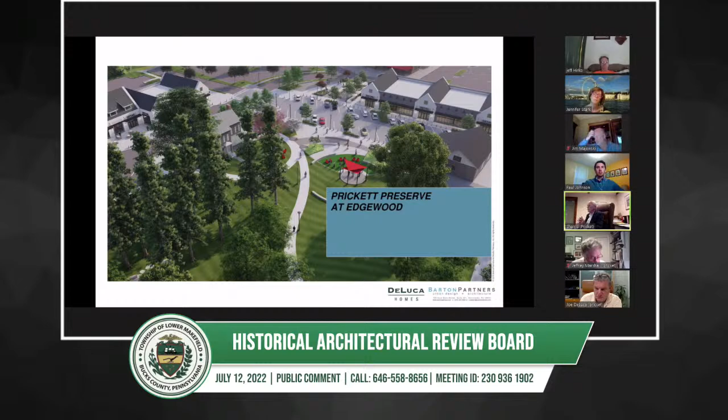I hope all of you got an updated PowerPoint presentation today. We listened, we hope carefully to the issues that were raised at our last meeting, and so we're prepared, we think, to address each one of those. Obviously, we're hopeful that at the end of the presentation and after we've answered any questions that any of the board members have, that you'll be in a position to recommend a certificate of appropriateness to the Board of Supervisors. As just one other issue, we recognize that the presentation tonight and the request to approve the certificate of appropriateness is limited to the barn.

We have not obtained a suitable tenant for the house. We recognize that we have to come back to the HARB for any improvements that will be done to the house to accommodate the adaptive reuse of that structure. So I just want to be clear that we're not looking for any action with regard to the house because, frankly, we don't have a tenant. We don't know what, if any, improvements will be made, and therefore we just recognize that we've got to come back.

So with that, if I may, I'll ask Paul Johnson of Barton Partners, the architect, to run through the PowerPoint presentation. The initial slides you will all recognize for the 800th time, and then we'll get down to the business at hand. Thank you, Paul.

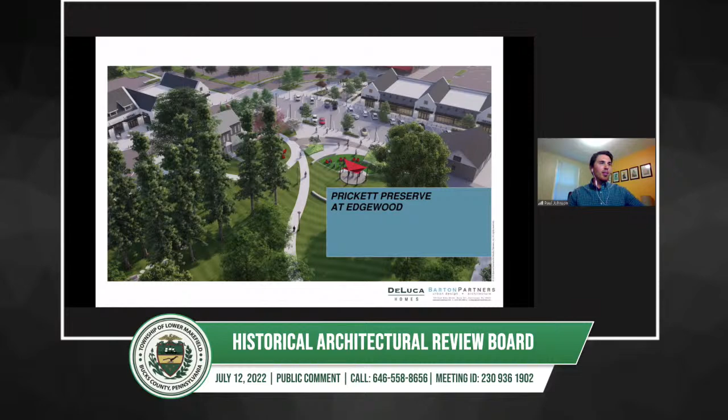Evening, everyone. I'm Paul Johnson from Barton Partners, as Steve said. The project we are presenting is the Prickett Preserve Barn. This is part of the Prickett estate. It is currently being used as an antique store in the existing barn.

The Prickett family has owned the property since the 60s. They have made improvements over time to the barn, and they have also lived in the house on the property. The barn itself is from the 1700s, 1800s. It's a standard stone structure with a minor addition on the front of the building. So the original barn would be the stone area shown here, and the later additions by the Prickett family would be the wood-clad and stone foundation areas of the front of the building.

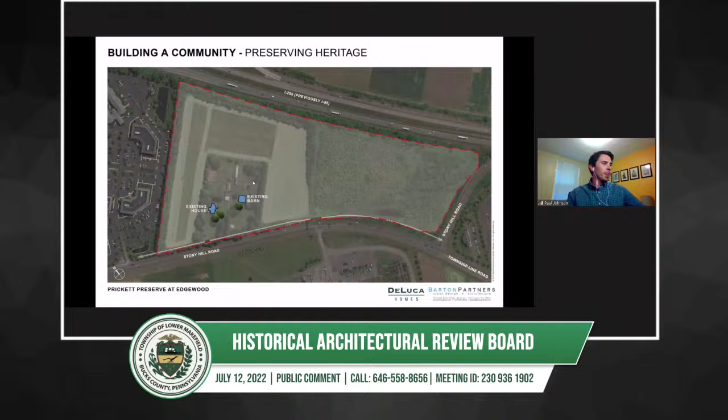This is an overview of the overall site with the Prickett's home and the existing barn, which will be remaining. The remaining buildings on the site will be removed as part of the redevelopment. With the redevelopment, there is a mixed use occurring on the site. Surrounding the barn and the house will be new retail buildings, a grocer to the far end, and an apartment complex with about 200 units and a clubhouse for residents.

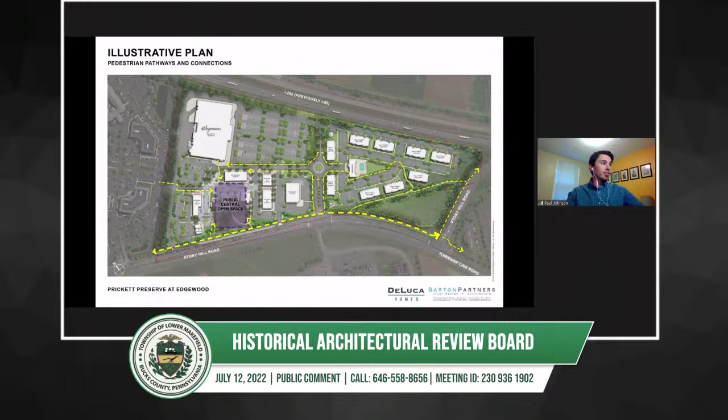This is just a further developed landscape plan of that site, just to show the park setting that we're creating with the new land development. And the goal of the area between the barn and the house is to maintain an open central public space that can be used for events, park space for the residents or anyone that's shopping at the retail buildings.

This is just a close-up view of that area. So there's walkways, there's a stage for possible performances, all situated between the existing house and the existing barn. This is a view with the barn on the left and the house to the right, showing that stage and that open park area relative to the retail at the bottom left corner of the image.

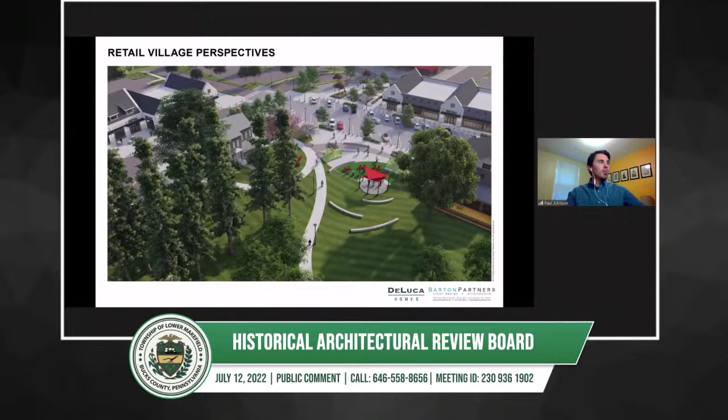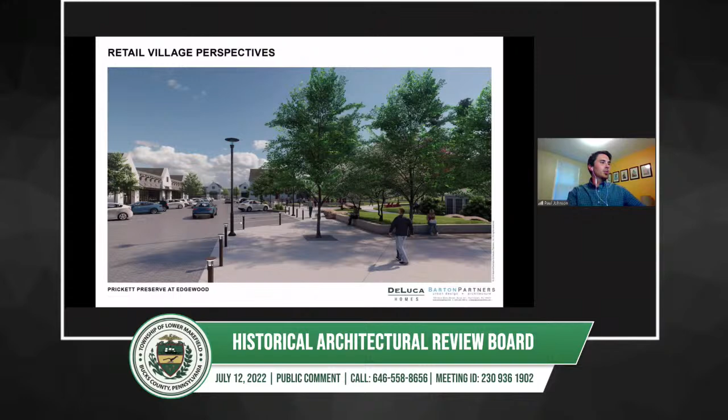The intended use of the barn is to use the existing barn as it stands, using the layout that's already there for the Prickett's antique shop, but adding an addition around the barn to be used as a restaurant space. The restaurant would be mostly open to the outside with glass connections to upper and lower patios that connect to the sidewalks around the building, and doing a new entry into the barn that works off of that park space to create accessible ramps and stairs into the barn.

This would be the west elevation of the barn from the park space. The house would be to your back left at this point. This is showing that the existing barn's in the back with the glass box idea of the addition to the restaurant in front of the barn.

The idea of the glass box is that it provides a minimal impact on screening the barn from the outside. With the glass being clear and the roof being minimized, the barn is always the backdrop, whether you're inside or outside the restaurant. You'll always see the stonework of the barn.

This shows the openness of the exterior facade with the upper and lower decks for the restaurant patronage. This is an alternate view of that same west elevation, just highlighting more the tiered decks of the barn area.

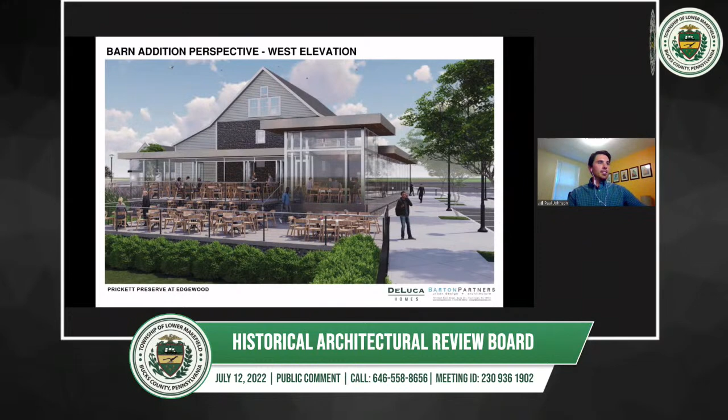I would say the big comment from the previous meeting was the grading around the building and the screening of the barn, which currently sits as a 3-story structure, which I will jump to the photos for reference.

The current barn appears as a 3-story structure with the roof area. As part of the new land development, the grade of the new site around the barn is raised up to a level closer to the existing first floor of the existing barn. This was part of the land development process, and we understand that the new grading will obscure portions of the barn.

But to create a usable retail space around the area, there sacrifice had to be made to create a level site for that retail area.

We also felt that the lower level of the barn, which only has about a 6'2" height, was not overly useful for any commercial tenant outside of maybe storage, but it's really not an accessible space. It's not a very usable space. There's a lot of beams, a lot of columns that disrupt the interior of the building.

Also, the lower level has been modified over the years. To the image at the top right, you can see that there were previous openings that were closed in. There's the addition to the left side of the building, which was a later add to the building. So there isn't actually much maintained on that lower level that was original to the building.

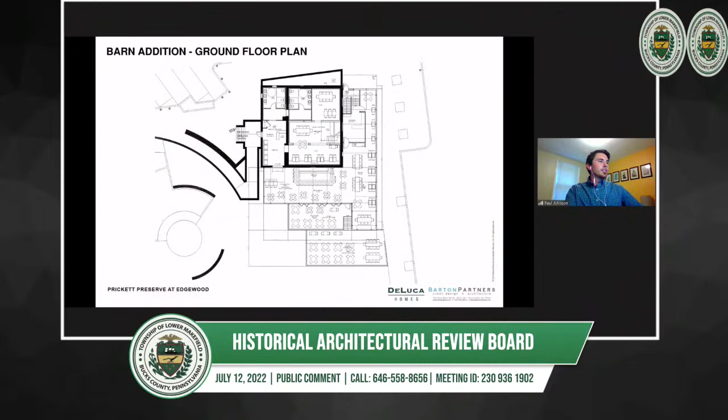An additional comment was in regards to the southern exposure of the new addition and what could be done to better shade the glazing without interrupting the clearness of the addition.

We extended the awnings from our previous renderings to a 3-foot overhang and performed sun studies at various times of a July summer sun: 8 a.m., where most of the southern exposure is in shade; 12 p.m., where the majority is shaded by the extended awnings; and 6 p.m. western sun, where that southern exposure is completely shaded.

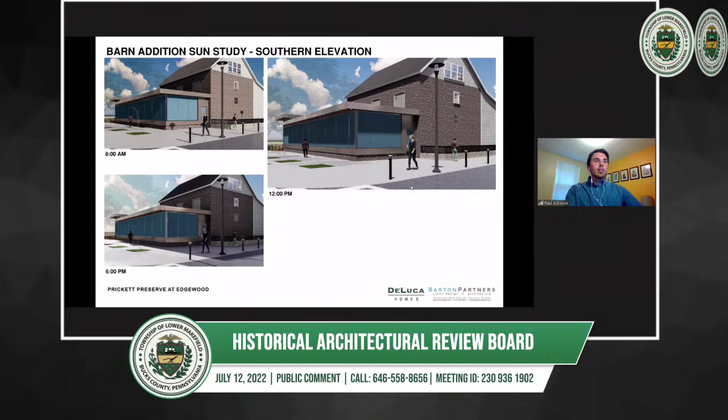We were also asked to provide a clear picture of the building materials, so we put together a list of possible stone, aluminum, stamped concrete, and fiber cement. We've selected a specific storefront glazing that is good for solar control but still provides openness and clearness, so there isn't a film to it.

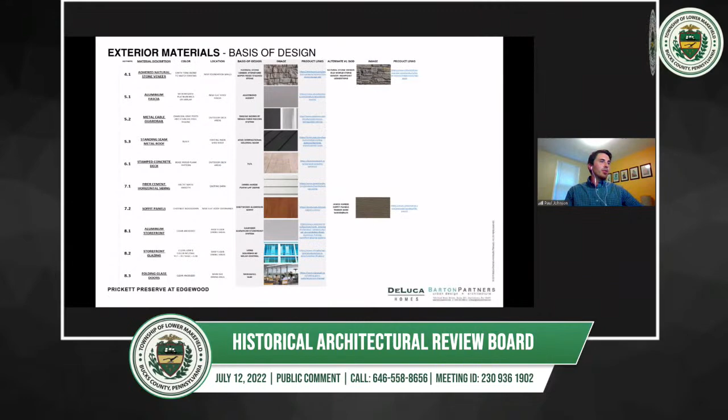I can touch on any of these if there are specific questions to any area. We've also provided a key pointing to those areas, so if anyone on the board has a question we can circle back. We've also included images of what these materials would look like relative to the glazing, the railing, and the NanaWalls that open onto the patio areas.

I believe that covers the comments brought up at the previous meeting. Is there any image you would like me to jump back to discuss?

Jennifer, can I ask a question? Absolutely. Mr. Johnson, I'm curious, are you going to be presenting any plans and specifications tonight, or are you only showing renderings and sample product information? We are only showing renderings and sample products.

We have not developed the overall building to a level of greater detail beyond schematic as we work on bringing the actual eventual restaurant tenant on board. The drawings have only progressed to a schematic level at this point.

Okay, because I think some of the questions, maybe some concerns at some level from HARB members who aren't here tonight, centered around specific materials and how they interact between the new materials versus the existing, to make sure there weren't potential for damage at worst, and from an aesthetic perspective, to make sure things go together.

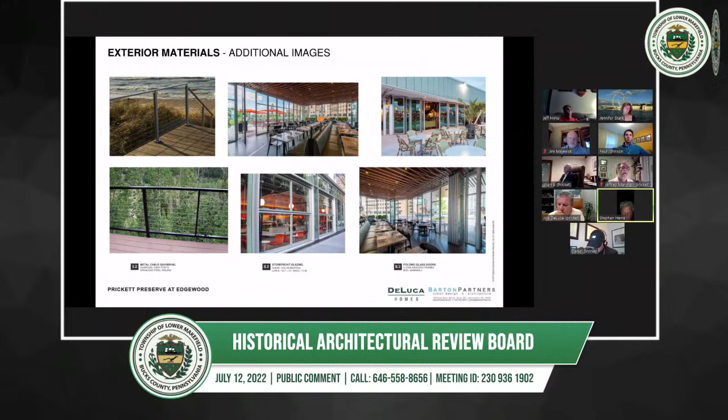If I may interject, obviously I'm not acting as chair tonight because I'm actually overseas and joining remotely. I must say that in the past we have dealt with this situation before, and actually are dealing with it in regards to the Miller barn, where we're discussing with the contractor, developer, how to proceed. An initial offering was reviewed and had some comments made on it, but there were some processes that they were going through that we were able to assist by being specific in what we would consider a desirable outcome.

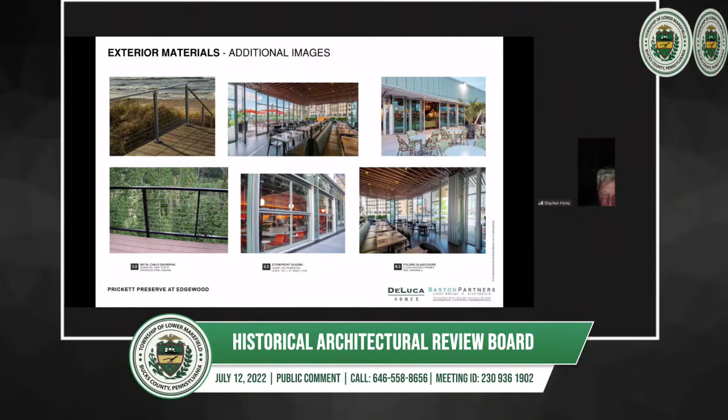And in doing that, we're giving them some kind of positive feedback and suggestions about how to proceed. I think that is the best we can do at this point. If we give a conditional approval, it would have to be based on the fact that everybody is comfortable with the entire response of the developer and the architect to what has been discussed in the past.

And I have a couple of comments to that, but I would hope to resolve the question that Mr. Harris had by saying what I said.

Well, I guess I'll respond by saying, okay, tell us what those conditions are. I don't know when you joined the presentation, Mr. Heinz. In the middle of what Paul tried to go through, what he thought were each of the issues that were raised. I understand.

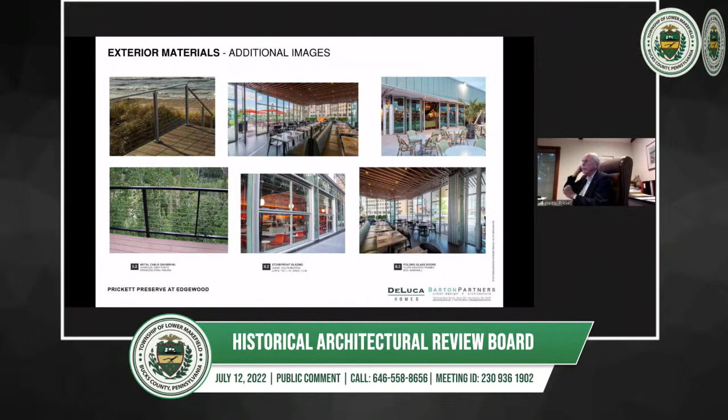And I must say that in terms of the specific little things, he's done a commendable job. The one major problem of how to put something that is very modern against something that is very old, and in this case historic, there is a certain amount of comfort that we have with new materials. But if they become overbearing and impose a new structure around the old structures, so that you really don't get the feel of the old structure, that's when some questions were raised, and those were seemingly not dealt with, because really nothing substantial in the plan or the elevations has changed.

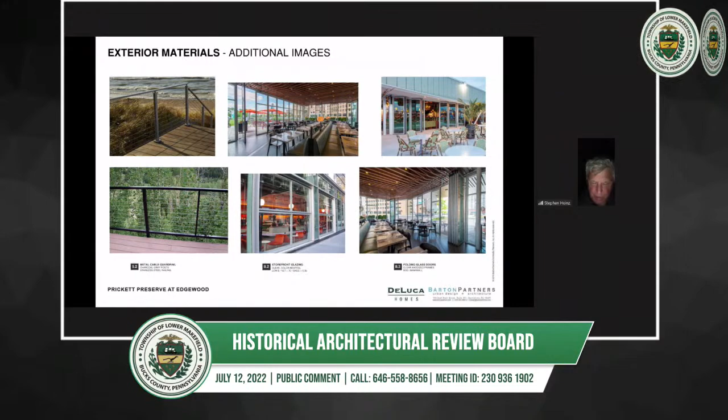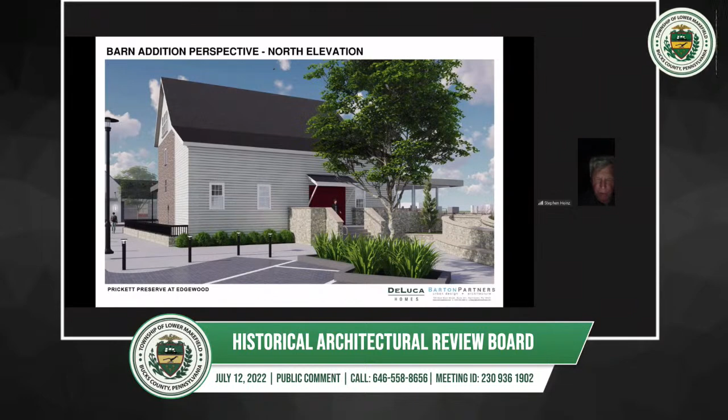So I guess the biggest thing I would have to say is, referring back to what Paul said, the facade that has this shed addition, clapboard addition — and I believe he's correct — is the one that is least valuable in terms of the history, because it was a later, practical addition, call it, by the utility of making it useful as a showroom by the Pricketts.

The majority of the barn, except for, I believe, the east wall, is pretty much enclosed by something new, and has what I think is a pretty thick plane pushed up against it. And if the plane were entirely a glass block, that might have some sensitivity in it.

And it seems to me that the point that is used in the corner for a raised — I guess it's almost a clerestory kind of condition. Certainly the piece of the roof is raised above the remaining roof. It seems to me lacking in, let's say, generosity or respect toward the old building by taking an even higher plane and putting it in the way of the view from the road and the people coming into the site.

I would have thought that the suggestions we talked about — maybe making some reference to the barn shape and definition, maybe even recalling outbuildings, and then connecting that to the barn by having that outer corner be a more sizable pitched roof kind of thing that looks like a corn crib or something like that, and then having the glass pieces connect to that — might make more sense. But actually nothing was done, or nothing even considered, perhaps, because this is the plan you want to go with.

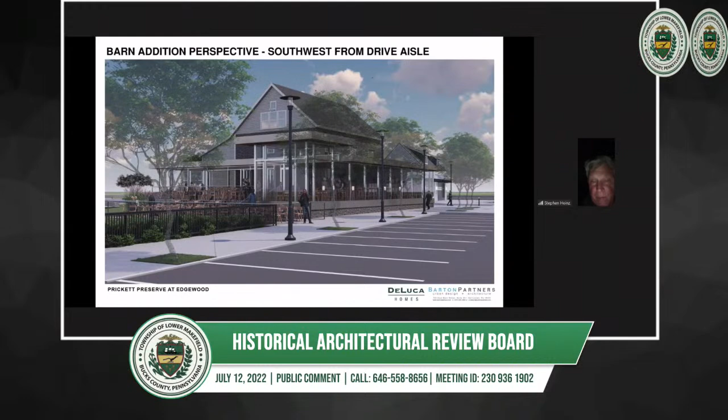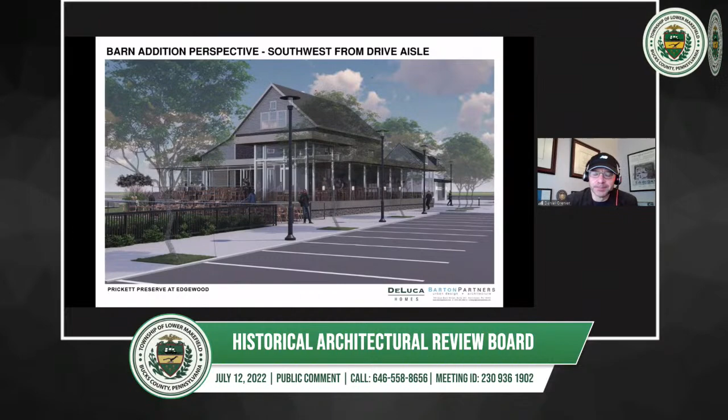Paul, what are you talking about when you mentioned the land development plan approval kind of squeezing you into certain options here? What exactly are you talking about?

So I'll jump to the site plan, I think this probably tells the story best. This would be that historic tree that we need to maintain as part of the approval. If that tree goes away, it requires a complete revamping of the landscaping to make up for what we've lost, because it's, I want to say, 100 years or around that time frame. Somebody correct me if I'm wrong.

And then also, as part of the approval, it was to maintain an open space between the two, so there was a visual connection. If we put an addition on the northern side of the building, it's no longer the historic house talking to the historic barn. It's now the historic house talking to a more modern addition, with the barn as the backdrop.

Where is that in the mixed use overlay? Have to lean on DeLuca, or Joe DeLuca, here. I don't have it in front of me, but a lot of the conversations, Dan, where everything was developed, was absolutely to have this open space connectivity. What language is in there?

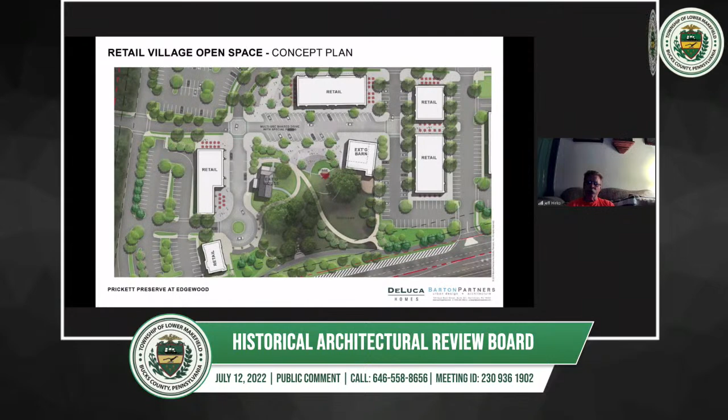Yeah, I think we're open to revisiting that corner area for sure. Joe, is this supposed to be a steakhouse? It is, yes. We're in pretty far negotiations. Hopefully it comes to fruition, but what it's planned to be right now is an Italian steakhouse. I have that in my head when I hear smokehouse too. I'm getting hungry.

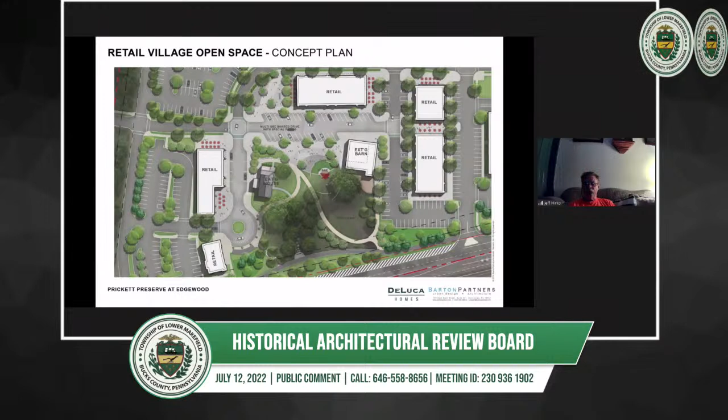Which could fit in with the restaurant theme. It could have something to do with barbecue, and outdoor something or other in that building. Again, if this comes about the way our negotiations are going right now, we're looking at this to be the high-end feature of the retail space, versus some of the other inline retail planned for those areas. So not that a smokehouse could not be high-end, but that probably wouldn't fit into the scheme of the potential user here right now.

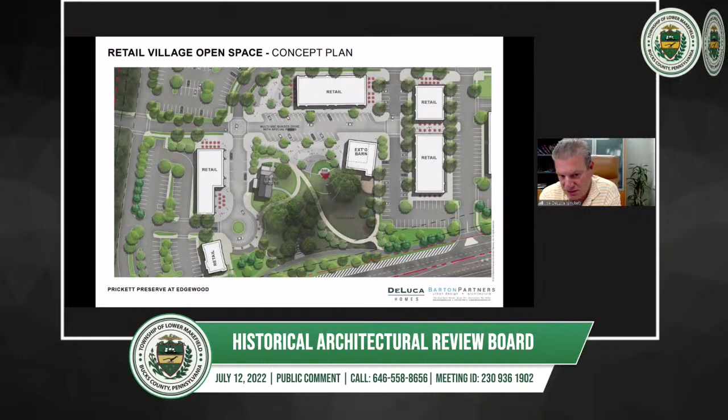Have they provided any design parameters that they need that would impact this? Actually, we've gone through the schematic, Paul. If you go back to the floor plans provided, they've been developed in conjunction with the end user.

And I just wanted to say one more thing. I know what Mr. Heinz was going to say, but I think the glass wall, as we look at this area, pedestrian friendly, people walking outside, being able to look in to get that feel of the barn, bringing that to the outside versus the solid structure. We put in the NanaWall doors where they could open up in the better months of the year. That was really to bring the outside in and the inside out, and the whole concept there was really allowing the feature of the barn to show through, not just to the people dining inside, but to the people outside. So from the last meeting, I thought we hit on, at least addressed all the points, and we were really thinking that we had this dialed in.

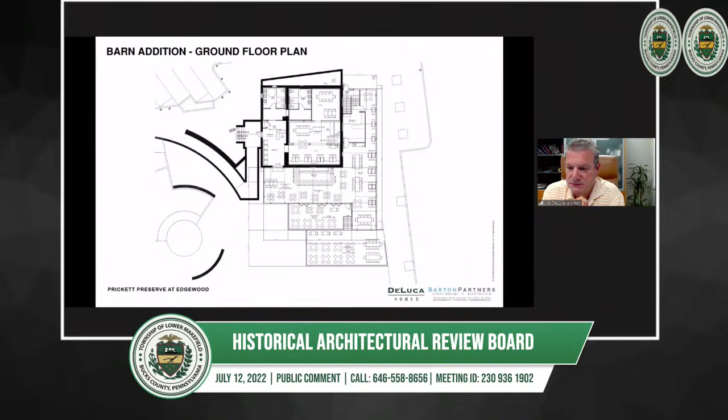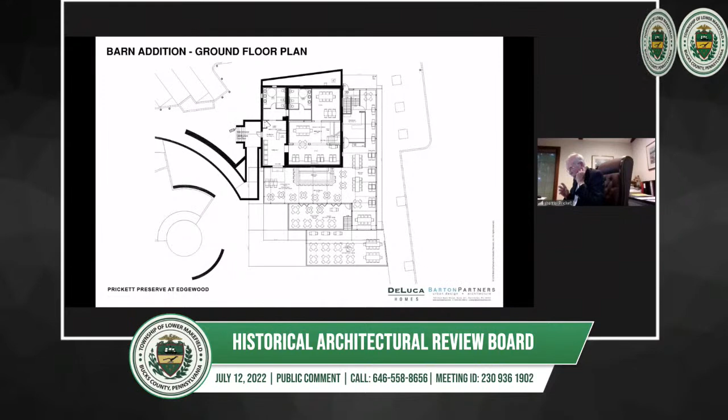Well, let me say this. I want to focus in. We've heard the comments. I think we've got to go take one more look at this before we ask HARB to make a positive recommendation. We've got to look at those issues about making sure there's no clash of materials. We've got to make sure we can demonstrate with something perhaps a little more detail that none of this affects the barn structurally. We'll take a look at the issue that Mr. Heinz raised with regard to that corner facility, which seems to have basically a table with 10 seats and some others affecting it, and make one more presentation at your August meeting with the hope that we can address the concerns we've heard and be able to move forward to the next step. And I'm not picking on Mr. Heinz, but he's been our most vocal critic tonight. Are there any other comments that the board would like to offer before we go?

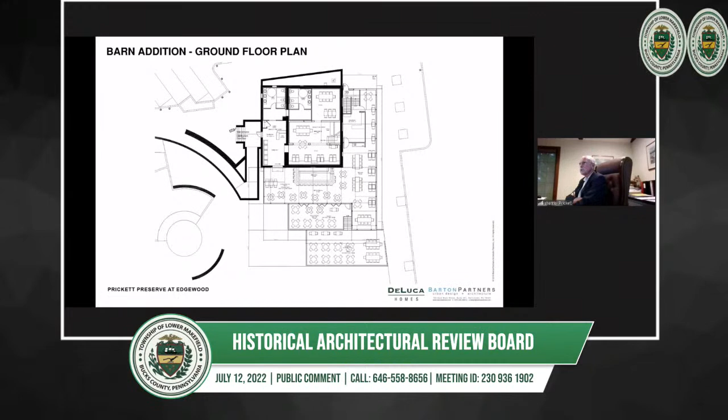I'm not going to say back to the drawing board, but before we reconsider some of the things discussed, because at least I've always heard, and I'm an amateur engineer, so why shouldn't I be an amateur architect, that when you adaptively reuse a historic building, you're supposed to approach it with modern accoutrements as opposed to trying to imitate the old, but that may or may not be true. In any event, I would ask whether there are any other comments other board members would like us to consider, and we'll come back one more time.

I have a comment or two, and my background is historic architecture. I'm a historic architect, and my philosophy is that the old and the new should be distinguishable as separate. I'm going to come at this a little bit differently. I'm interested in exploring the idea of a glass jewel box coming up against the historic barn. In my sense, you are approaching that finesse really well. What I would like to see, though, is the glass box coming up to the barn, but I'd like to have about 2 feet of relief between the box attaching to the barn with a different material. I usually indent or create a distance so that there's a shadow line when you're looking at it, so that you can see the two structures coming together.

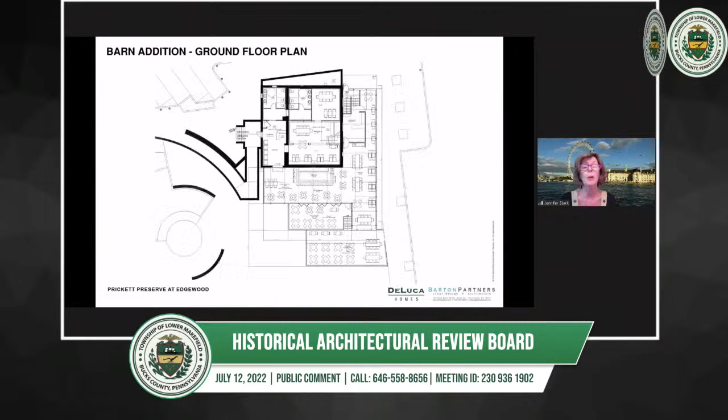And it could be zinc, it could be something interesting, but the point when I first looked at this last month was, oh cool, a jewel box coming up to the barn. I also think that the ramp you're showing and the heavy masonry at that door on the other side - I really like the cable railing that you're showing because it's transparent and you can see through. I think you're putting a lot of heavy masonry here, where if all of that was cable, the barn would read because you can see right through it.

And then the historic stone is what's making the massing of the site for this particular building versus new masonry, which you do have to have at the foundation of your new portion, but certainly you don't need to use it at the entry here and some of the ramp. So I just threw a wrinkle in if you want to try to explore any of those concepts.

I'll ask the question because I didn't understand it, but maybe Paul did. I didn't understand what you were suggesting when you said the 2 feet between the glass and the brick. You're talking about a channel, or Paul may understand what you were saying, but I apologize, as a non-architect I didn't. That's all right. I'm understanding it that, say, this area will just have a recessed relief indented from the facade of this building that creates a more pronounced separation of the two. Am I understanding that correctly? Yep, correct. And I was trying to figure out how wide would that have to be to make the point. Was it 18 inches, I think 12 is too small. I wasn't quite sure.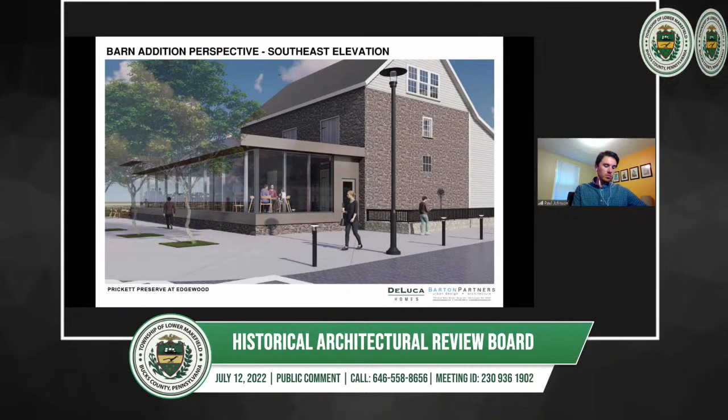Anyone else? Paul's got broad shoulders.

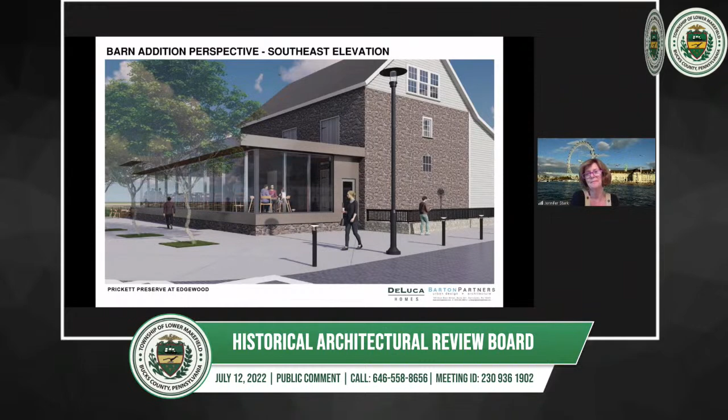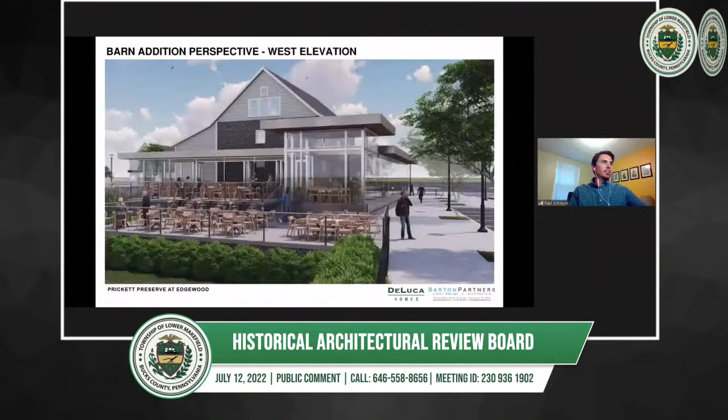And Jennifer, on the other thing, with that one entrance stairway entrance, that's a lot - that's not original stone, right? That's just adding a lot of stone work to masonry to try and match that as best you can. Yeah, that's a lot of stone, that's heavy. But I like what you're saying. This is the existing entry here. I got you.

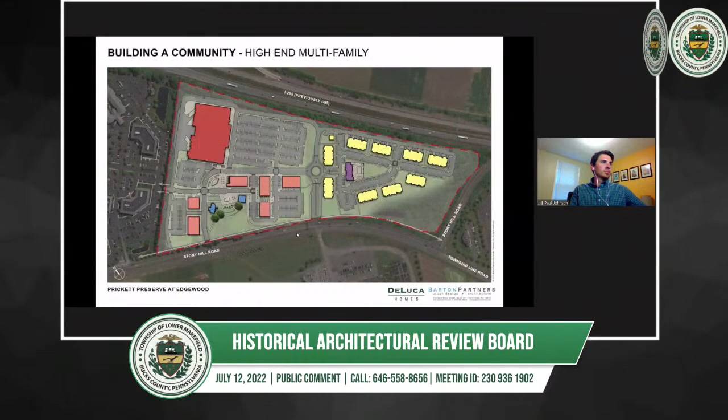I don't know if we've heard from Luba yet. Luba, are you there? Oh yes, I'm here. Actually Jennifer just said exactly what I was going to mention, but she said it obviously in a more articulate way than I would. I totally agree with that mention about the entrance being rather heavy, and I would tie that together with the transparent lightness of the glass box. And that box would be articulated separate and not really competing with the barn itself.

I was just going to say that I really liked where you were going with the glass idea of keeping it open in the backdrop. And I think Jennifer's comments were perfect. I think her comments and ideas would make it even better. Not to be kissing up, but that's what I think.

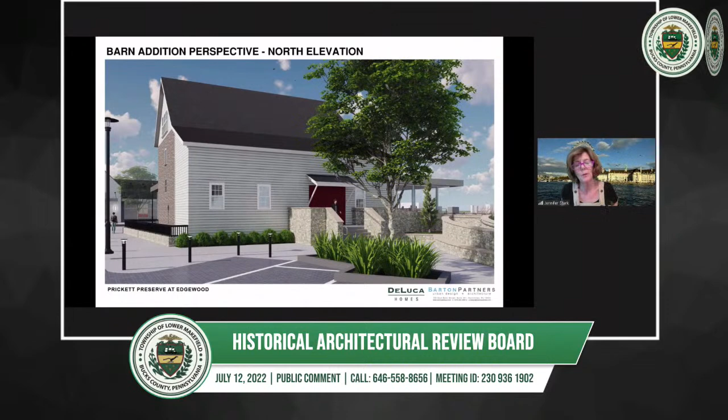Well, thank you very much for this wonderful discussion and all of the input from both sides and everyone. Now I'll ask the two questions I've been dying to ask.

Ms. Stark, is that Stockholm behind you, or where would you like to be sitting, in front of that waterway? This is London. Oh, it's the big - what do they call that, the O? I don't even know, I didn't go on it, I just took a picture of it. London Eye. Yeah. And I'll ask the second question I'm dying to ask, to Mr. Heinz - where are you?

Ireland. Oh, lovely. Well, I'm having a birthday, one of those birthdays this year, and I'm taking my family over to my favorite hotel in Ireland, which is the Dunraven Arms in Adare.

Well, we're getting around to a lot of places. I was at the Cliffs of Moher today. So that's lovely, happy.

Yeah, you're up in County Clare. Well, Adare is just below Limerick City. Depending on what you're doing, go to Adare, it's a lovely little village. The Dunraven Arms is a wonderful hotel and restaurant. And Adare Manor has the big golf course where they played the President's Cup or the Ryder Cup or something 2 weeks ago. So it's a place you ought to put on your visit list.

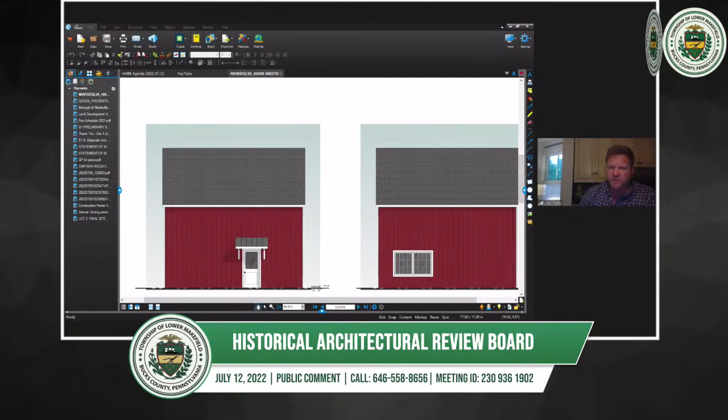I think the biggest question we have moving forward as we move around is replacing the windows on the side, then moving toward a new entrance on the side of the barn that would connect to a walkway over to the existing stone house. One of the places we are with this project is looking at the existing barn facade versus the new, where the siding is warped and a bit damaged. We're looking to remove that and replace it to make the exterior of the barn more weather tight, and possibly utilize that siding on the inside of the barn.

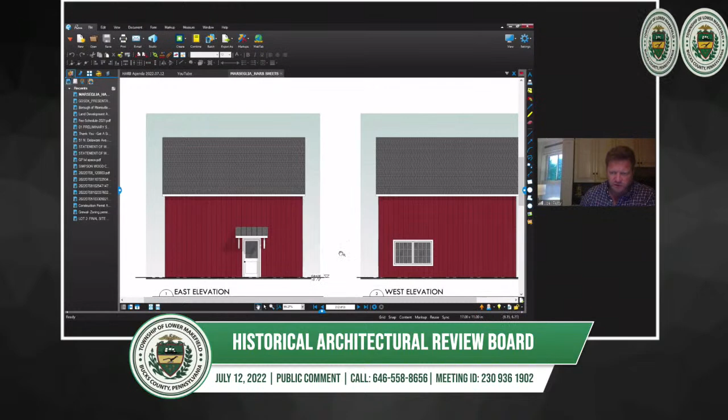So one of the conversation pieces is, is there any directional input on whether that is something you'd be in favor of, as opposed to basically replacing it either in kind with wood or switching to a composite HardiePlank type board and batten siding? I think Eric, tell me if I'm wrong, but you'd be in favor of each, but obviously one is going to be a little easier and more cost effective. I think one of the goals with the project would be to replace the siding and be able to sheathe and weather tight the exterior prior to the office installation on the interior.

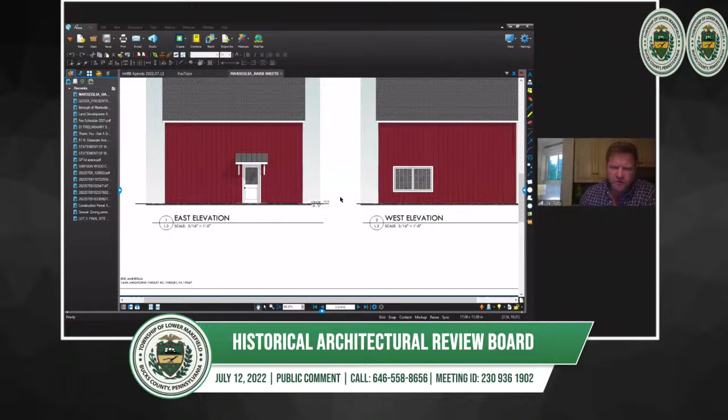I think when you look at the existing barn facade, if you can all see the pictures, is that what you're looking at now? This is the void we're looking to create the recess in. That's the door we would be removing and replacing with a panel. But the siding here is going to be difficult to basically fix and refurbish, and it's been patched in places where that's also difficult. So some of what we're looking to get is input on whether that is something that would work better to be replaced, or whether we do our best to refurbish it. We would love to take that material and whatever pieces of it are salvageable and use them on the interior and then replace the exterior.

Steve, did you want to say something since you're up? It's what, 2 o'clock in the morning or something? It's almost midnight, but...

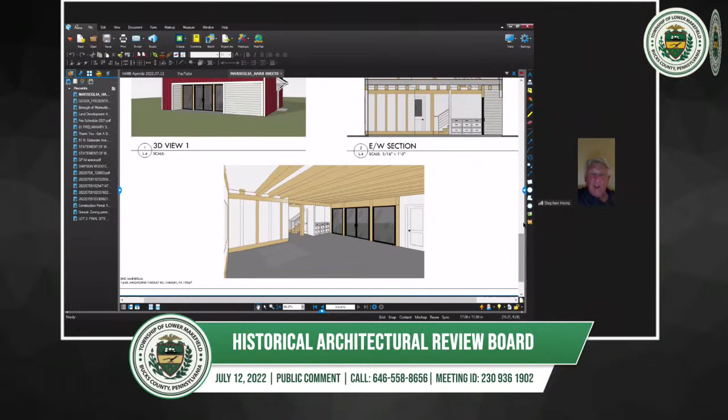The reaction I have is that it's very well conceived. The idea of the panels with the clapboard lap siding really works well. The idea of taking wood from one area and putting it elsewhere might be nice to see, as much as we're mainly concerned with the front elevation, to do what we can to utilize the wood that's already on the building in terms of repairing, refurbishing the wood on the front elevation, and emulating it with new wood material would be preferable from my point of view, but I'm sure there's cost considerations. There's new treatments, especially heat treatments of wood materials of a very solid species, and having it treated by almost baking every drop of moisture out of it seems to do quite a bit toward making it a long-lived material and providing some kind of guarantee that it will stay in a manner that doesn't require too much maintenance to continue its pristine appearance.

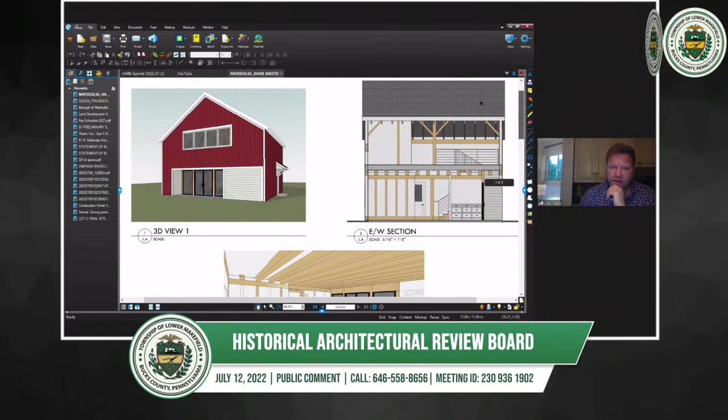Is there any opposition to the new entry door on the side as far as a connection to the existing house? I think they would prefer this as a side entry kind of piece, but there's an existing window now that mimics the one on the other side, but it's obviously damaged and coming out or getting replaced. The goal on that would be to eliminate this window on the opposite side and create the entry door. And if that's acceptable, that would be the goal.

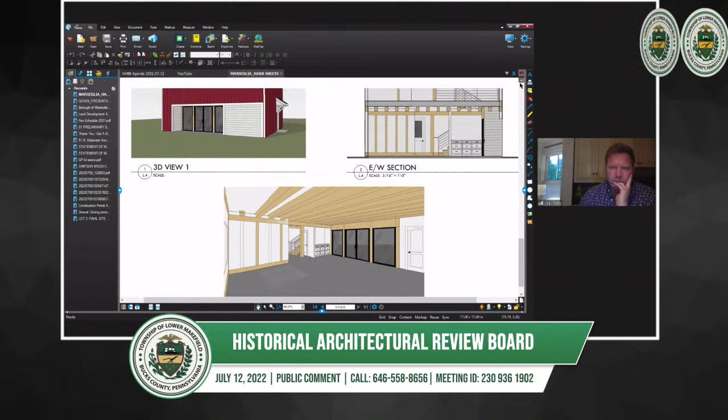Jeff, I don't have a problem with that. I think that looks fine. Okay. Luba? Yeah, that's fine.

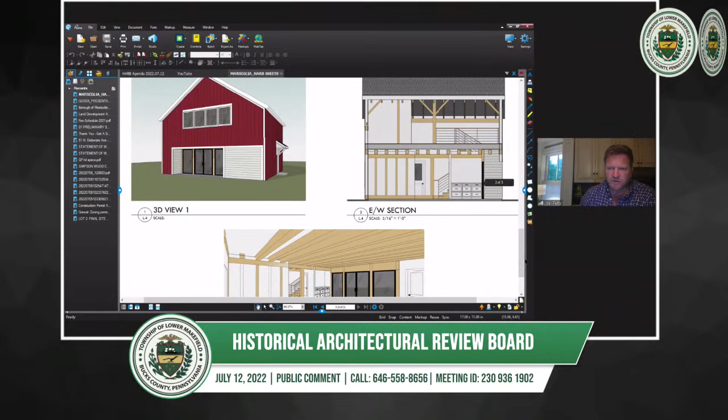I think beyond that, it's really replacing the windows that are there with ones to match, and then adding on the rear elevation. I don't know whether that comes into play, but on the rear elevation we were basically putting new windows in the back, which at the moment has no windows at all. Eric and Drew would love to have this view over the field, which is fantastic, to work with the windows that are on the front. And from the lower level meeting room, we could get some windows as well, but that would be the goal on the rear elevation.

I would say that if we had more specifics as to choices of materials and techniques - the actual window dimensions, the manufacturer, the composition - a little harder definition of the specifics and specifications in the drawings, we could probably approve it. Not having the color called out, not having the exact material, you're still looking at it in a way that we can certainly deal with and give it approval.

It sounds to me like everybody's on the same wavelength here. I think that would give us enough direction at this point to get into more final drawings. And if the direction is good, that's step one.

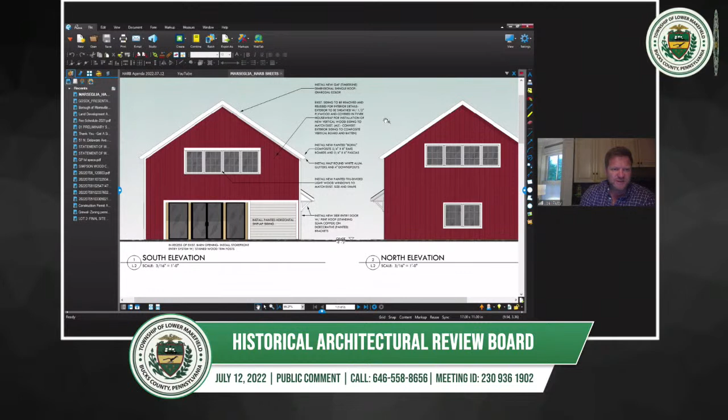And I know we'd also had some talk about the front, but I think we're starting to look at the site plan as well, and we'll be talking more about what options there are for the front parking and things. I know we had talked about maybe presenting some materials and options for how the front of this will look in connection to the street, but we're trying to avoid the look of a parking lot area if possible. But I know we do need ADA access and some of the rest of that. So we'll be able to present that as well at the next meeting.

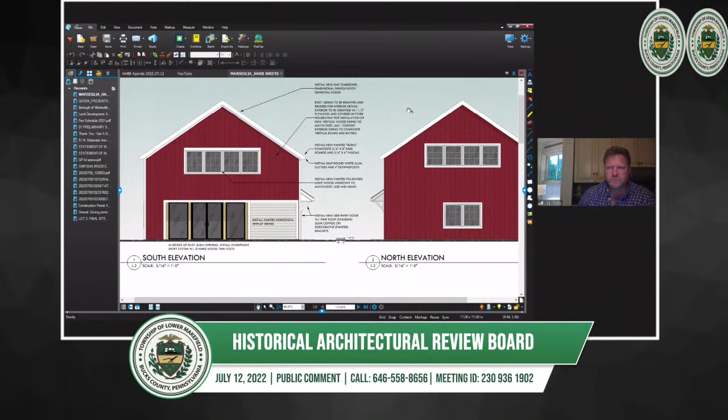Do we have any other business to go over? I didn't see minutes that we needed to approve. I don't think so. Okay, well then I'll make a motion to adjourn.